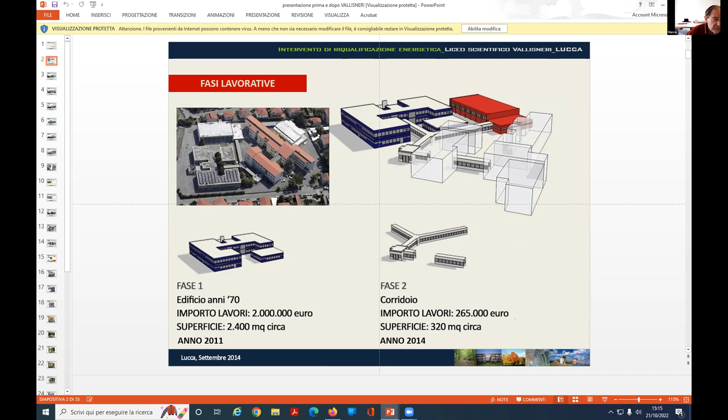We first approached this complex, and next we will show you all the different interventions we performed here, starting with the analysis of the existing building. We start with this one, which is a more modern building, because this one is the oldest, realized maybe 60 or 80 years ago. Then this building was realized, and that's the gymnasium. We started with this because, despite being more recent, it was badly realized.

The approach was to change the cladding, the exterior, completely, making a deep intervention to respond to the goals of the administration of Lucca. The goal mainly referred to energy conservation, but also to the safety of the building against seismic risk, because this is an area of Italy where seismic risk is quite high, as in Greece, I think. And the building, when it was realized, did not incorporate the most recent achievements in this field.

You can see on the left the images of the building as it was at the beginning. It is a precast metal structure, which was quite common in Italy in the 60s, and it has been totally retrofitted. Here you see images of both before and after the restoration. But let's start with the analysis.

Analysis means to analyze all the aspects of the failure of this building from the energy point of view, from the functional point of view, from the seismic response point of view, of course, but also from an aesthetic approach. Because I think that when the public administration decides to invest money in an existing building to ameliorate energy response and so on, there is always an important aspect, which is how the building communicates this to the users, to the population, to the city.

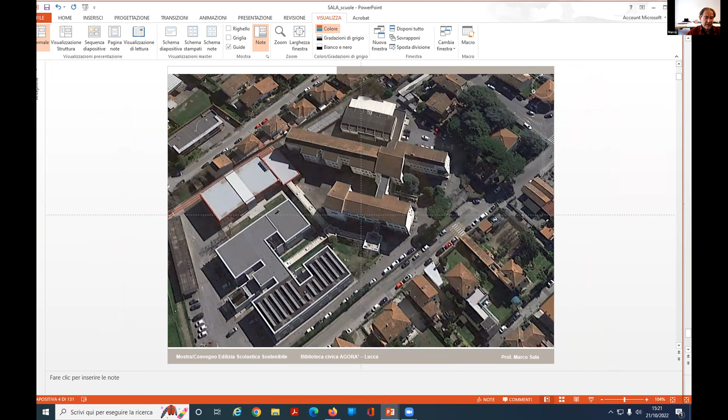So sorry for that. We started with the position of the building in the town of Lucca, and you see it's in the outskirts of Lucca. Here is the complex. This is the oldest part, the part in which we started the first intervention, and this is the gymnasium. The images of the building as it appeared before.

The different parts and the different phases, because when you approach a retrofitting program, very rarely do you start all together, but you have to organize different steps, especially when you want to keep the function running while you are working, as was the case for us, because the school was full of students. So we decided to make three different approaches. First, the anti-seismic response, then a part of the building with an increase of volume, and then the other part. And here is the strategy that's been applied.

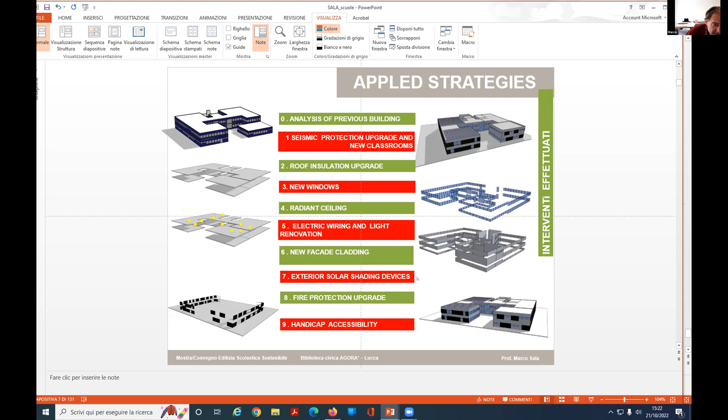Analysis of the previous building, seismic protection upgrade, new classrooms, roof insulation upgrade, new windows, radiant ceiling, electric wiring and light renovation, new facade cladding, exterior solar shading devices, fire protection upgrade, handicap accessibility. These are the different elements symbolized by the technical elements. And here is one of the first interventions.

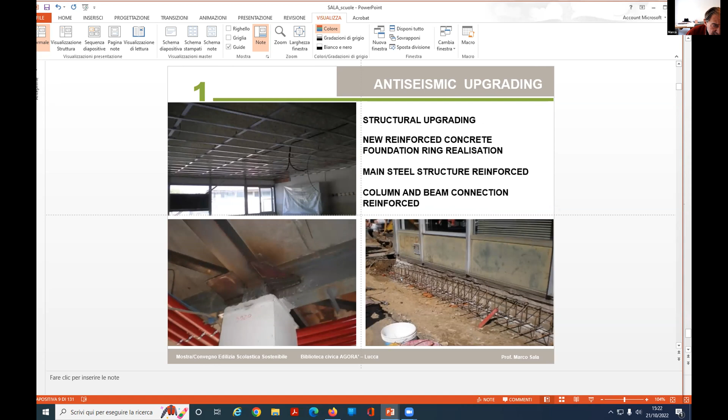We decided to intervene on the foundation by realizing a concrete ring at the base of the building, because these elements were lacking, in order to rigidly connect all the columns of the building. Then, since the building has a steel structure, which is quite an easy case, because you can always intervene on a steel structure, we may intervene by adding cross bracing and bars to increase the rigidity of the structure, or to increase the dimension of the beam itself.

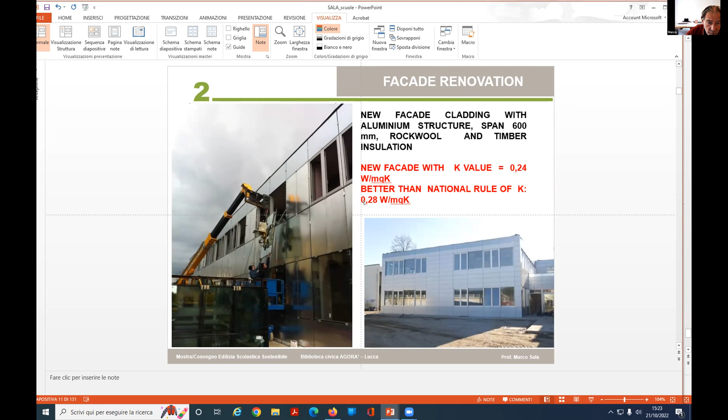Here you see some interventions from the outside, and the value that we were able to reach. The new facade was able to reach 0.24 watt per square meter, much better than the national rule, which for this building is 0.28. And here are some details. How do we apply this?

We decided to design a new cladding by adding components, different layers of insulation with different properties, glass fiber, rock wool, and plasterboard, and metal sheet to protect everything. Of course, the window frames were high quality, double glazed, and all the details explained. In the cladding, the final cladding outside was Alucobond with the aluminum surface, in order to have a kind of small ventilation under the outside skin.

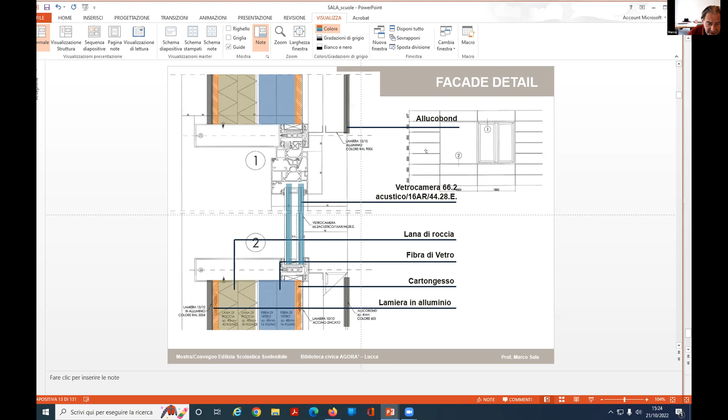And when you arrive to the ground, use a different kind of insulation, XPS, in order not to be affected by the humidity of the ground.

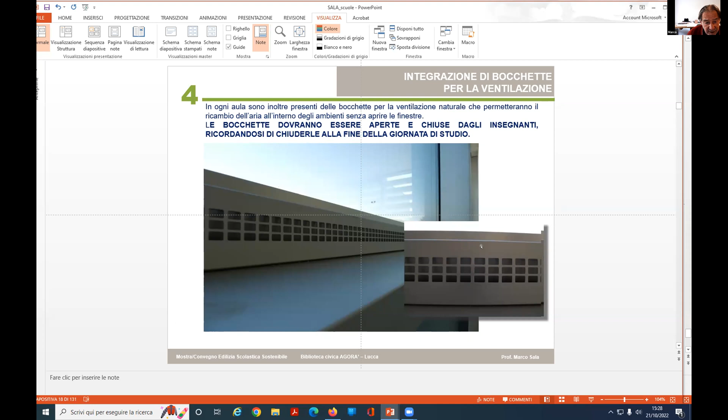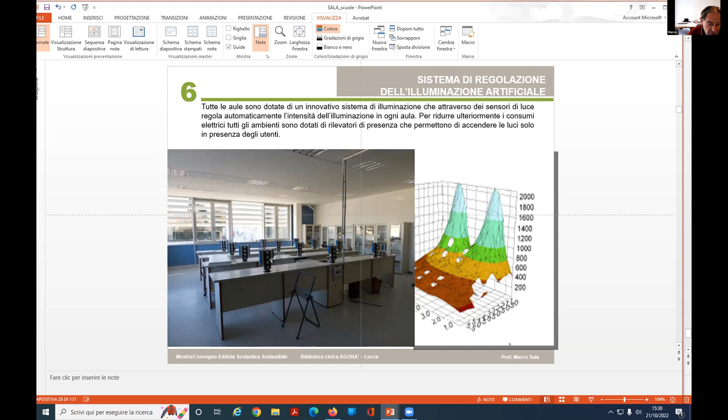But today you have to face the reality that, especially in university, most of the time people use computers, and having too much natural light affects the possibility of having a good view of the screen. And so this is one of the reasons to reduce the dimension of windows to the minimum allowed by the regulation, because there is no more such a need for natural light in the classroom, the laboratory, or the study offices of universities and schools.

Again, other elements, and here the elements of the calculation of the energy need. We pass from 60 kilowatt hours to 30, with a CO2 emission which is half of before. You have to think that a building such as a school or university does not have the same values as houses, because they are used for a very reduced part of the time. School during the morning or morning and afternoon, not during holidays and so on. While for houses the numbers are more important, because you live inside all the time.

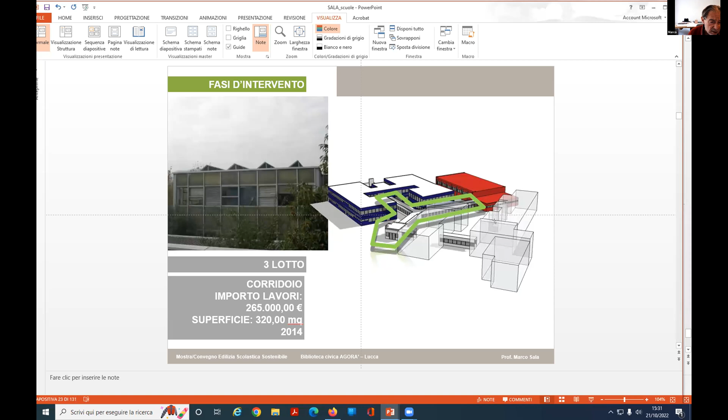Another intervention was regarding the connection elements. You see these connection elements with a simple corridor that connected the gymnasium, this part of the school, and the other part of the school. Also the very same type of construction, very poor insulation level, very poor comfort.

And here we decided, for the same reason as explained before, to give also an aesthetic approach, to introduce some colors. And in order not to seem too much like Gothic architects, but to take our inspiration from the past, we started from one of the most beautiful churches in Lucca, something most ancient, San Frediano, in which on the facade there is this mosaic with beautiful color. And so, of course, there are some explanations that are very good to present the project to politicians and to clients. Architects have to also couple their activity to this presentation.

So we decided to utilize some of the color. It is an excuse, of course. In reality, we wanted to have a brilliant color in this corridor, and also with the use of the new material. This is a polycarbonate wall, cavity insulated wall. They are 4 centimeters thick with a lot of channels inside. There is not direct vision, but you have only the transmission of luminance.

And here happen the very strange elements. These are the elements, very easy to be put in order. The aluminum profile, top and front. It can be up to 6 meters high, 6 meters long with these elements. But one aspect that we hadn't really imagined before is that when the building was finished, from outside you just see the color. It's also a very good element that makes a more pleasant and more friendly approach to the school.

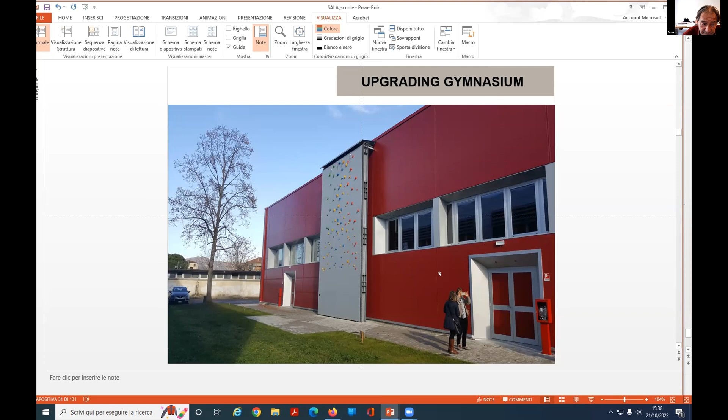And from inside, we added acoustic panels, because generally gymnasiums are very disturbing acoustic spaces, because the students make noise, cry. So the acoustic component is very important. And the result is this. It's the same school. This cladding in the red color is another aesthetic approach to make the difference between school and gymnasium. Here you make sport, here you relax through physical activity. So it's very good also to make the difference. And this is the thickness that we reach, because we added this on top of the elements that were exceeding the facade. And what is this one? This one is, oh, sorry.

Since we had to intervene on the structural and seismic resistance of the building, we built an additional resistance structure in steel and concrete outside, very high, on both sides, in order to block the entire structure of the building in case of a possible earthquake.

And on the exterior surface, since this is a sport hall, we made a climbing wall, using all the elements that are used for sport activity, for climbing, with the safety rope and everything, in order to utilize also this system. To try to couple utility with functionality, with the aesthetic aspects. And even this was very much appreciated by students. This was during one of the visits of Habitat Center, Master Habitat, that we performed in the past year.

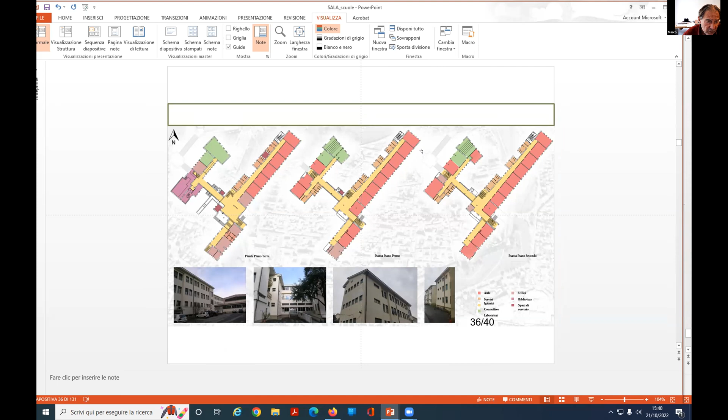And now the third part. You remember, you have seen this one. This is the existing, the more ancient brick block school. First step, analysis. The analysis of the structure, we made a historical brief control of how it was built at the time. We made a control also with the thermal camera in order to check the data of the block. Different floors. The distribution was classroom, corridor, and services on all the floors.

And we decided to make an approach to add some structural elements, as we had done in the gymnasium, to provide the resistance. And we developed with the engineers a solution in order to increase the structural resistance. The input from the property was additional classrooms, because the number of classrooms was not enough, anti-seismic performance increase, energy efficiency increase. So the first hypothesis was to add some groups of classrooms with steel and concrete in order to give resistance elements that could provide a good resistance to the whole building.

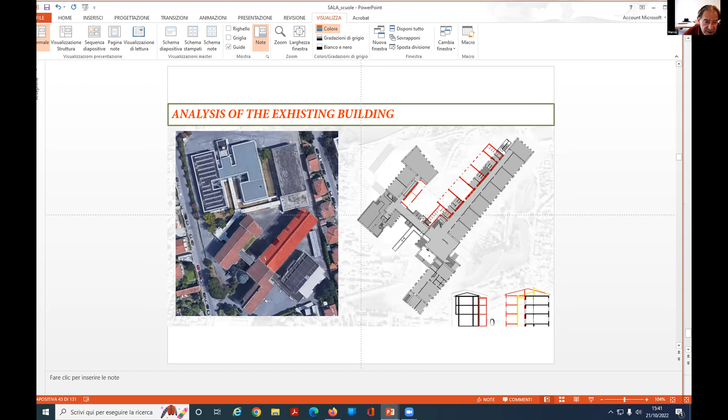This is the new one, this is the existing. We developed the technology, dry assembling, and so on, the idea of bracing with the steel structure, everything. The thermal performance was the easiest part, it was not the problem. But there was a problem that at the end, after this analysis, there was no economic convenience, because there is a rule, as in every country, in Tuscany, that if the cost of intervention per square meter is too high, in this case 850 euro per square meter, it is not convenient. It's better to demolish and make a new one.

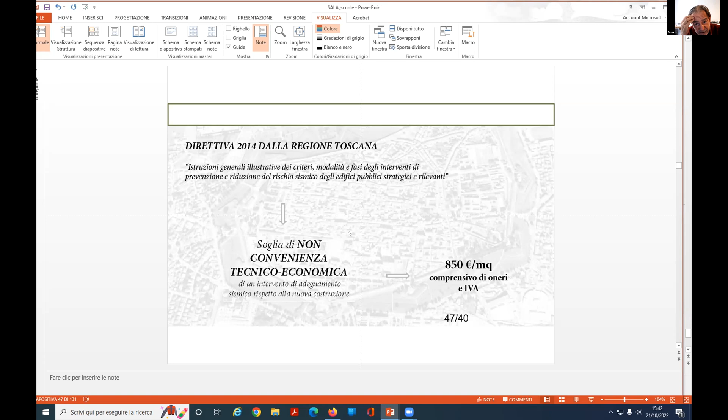So all this analysis, of course, we studied and were paid for, but the administration decided it was useless to spend all this money in this way. And so we decided to demolish the existing building to make a new one. This shows the importance of the previous analysis, the importance of evaluating all the possibilities you may have to give a correct answer to your clients, to the municipality, to the community. So this intervention was more, see, 1,173 was more than 850. So not economically convenient. So alternative interventions.

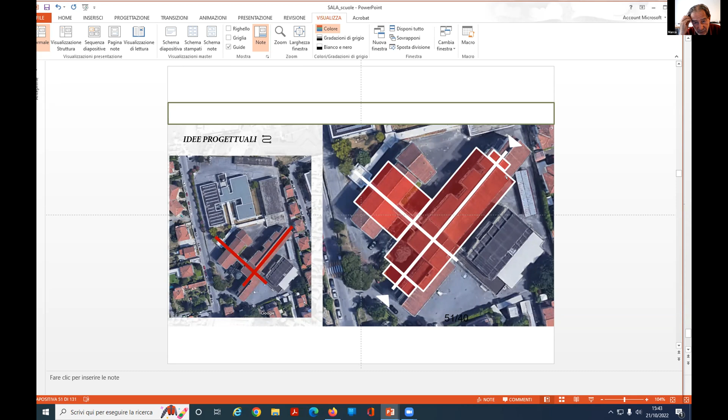These are the existing. Of course, the space is quite small, and also the access was important. And we decided to keep the access, to respect it, and to make a totally new building, very simple, very easy. Also because we decided to use as a structural technology wood technology, cross-lam and platform frame technology. So less is more. This is the most important sentence for architects, remember. And we decided to make it simple, because the value of architecture is not to make very strange or very artistic performance, but to give the best answer to the requirements of the clients, the requirements of society.

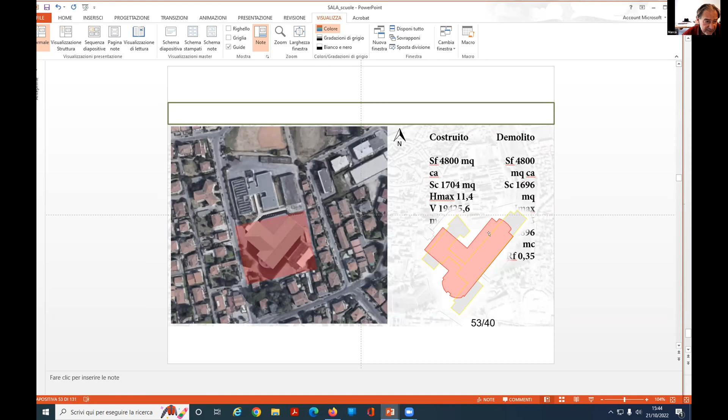So we designed a building which seemed a bit to come from the past. We decided not to have the traditional long glazing windows, as many schools after Le Corbusier have, these characteristic horizontal elements, but we don't need so much light in school areas. So we decided to have single windows, very regular shape, very regular system. These are the elements of the new building compared to the existing one. So it stays inside the dimensions and also the distance from surrounding buildings. And the distribution is quite easy, quite simple.

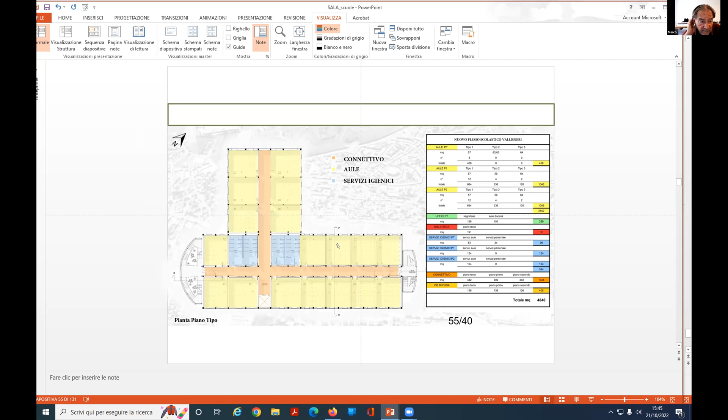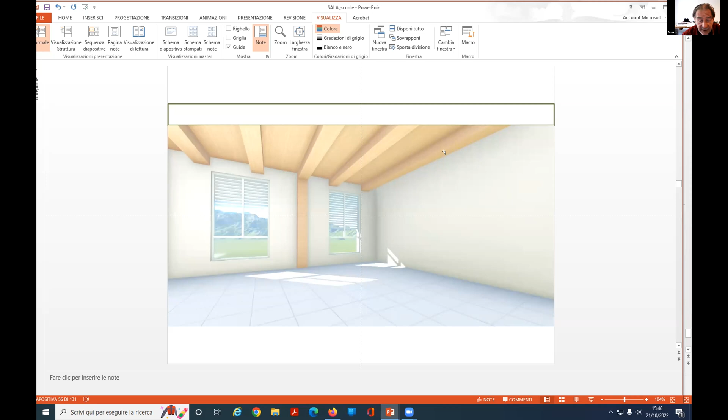Which is quite good from the aesthetic point of view, because if you go into the building, they say, oh, this building is built by wood, and the building is exactly the same as another done by brick, and you don't feel much excited about it. So what was the reason if I use a technology that I cannot see? But there are also technical reasons that do not allow making this decision practical. But we try always to

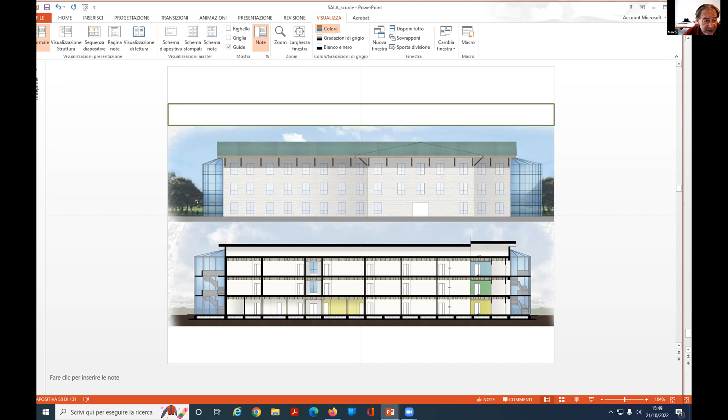The structure is a combination of platform frame and X-lam frame, because it's a very quick system of construction, with very good performance also in anti-seismic resistance. There is maybe one negative aspect, that you cannot modify it. But why do you have to modify a school? The classroom remains a classroom. Sometimes this aspect of considering the possibility of changing during the years is one of the many illusions of architects.

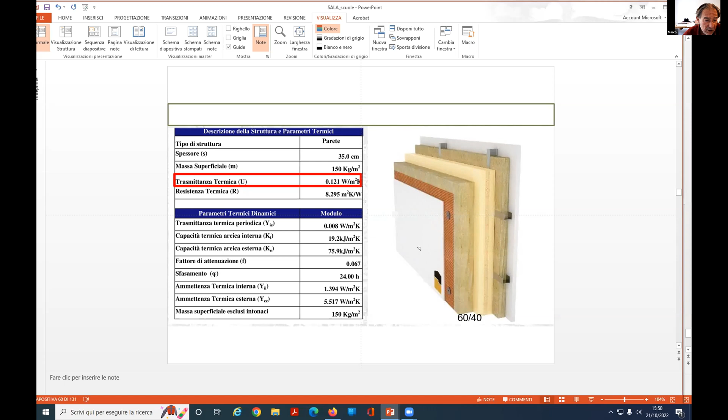And from a technical point of view, we wanted to utilize heat exchange with the ground, but later on, discussing with our engineers, we decided that it was better to have a heat pump in this space on the top floor, and photovoltaic panels on the south-exposed roof to supply electricity to the heat pump.

Again, the detail of the staircase, and this element. This is an intermediate space, a winter garden. It means that it's not heated. There are no heating elements inside. And during the winter, it naturally stabilizes to an intermediate temperature between outside and inside the building. It means if you have 0 degrees outside and 20 degrees inside, this goes around 11, 12 degrees.

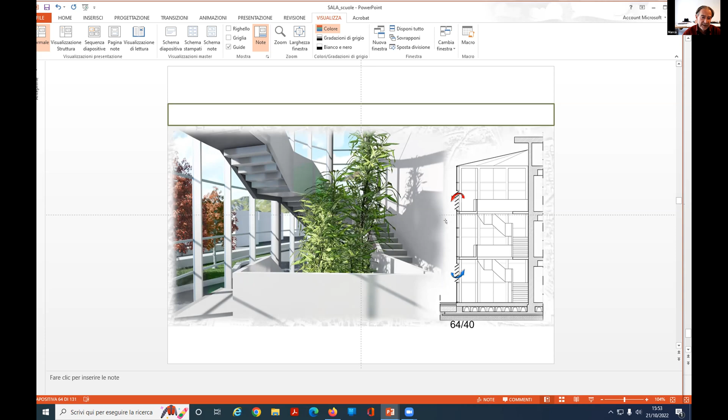And the important thing is to over-dimension the openings and to make the openings automatic, all electric, in order to have control during the summertime of the real ventilation, following what you have in mind, not only because you have designed a red arrow or blue arrow. And again the approach from the street and the corridor became a symbol of this structure.

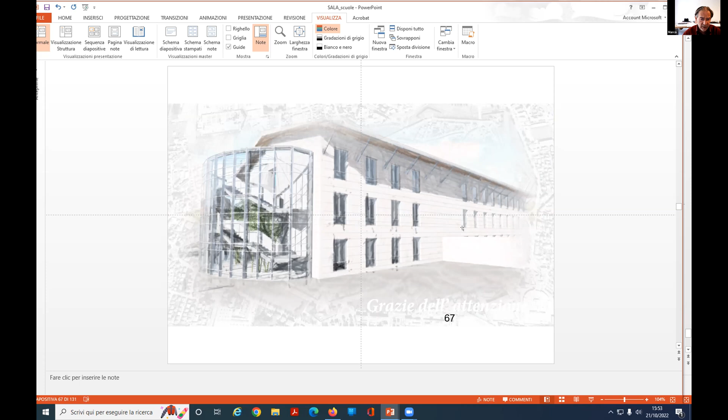There are economical aspects, and also from an economical point of view, having done a very regular structure allows you to have a good performance. Another very small and very simple retrofitting intervention is near the seaside, another school. Here the sea; the school is a big building, realized during the 50s, 60s of the last century. Quite a big intervention.

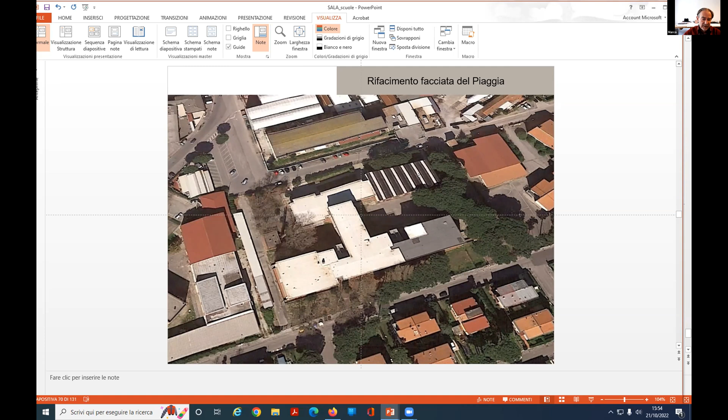It is a waste of money, because when you realize this kind of solution, you don't serve the interest of the clients, you damage the clients. So the answer is very easy. We make insulation, we reduce the windows, we add thickness because the insulation in this case is quite important, 20 centimeters of insulation. And the activity inside is exactly the same, much better, because for the secretaries working on a computer, this glazed facade was terrible, while this is proportional. You have to control it.

This was the rendering of the proposal. Sorry. These are very bad quality pictures. You see, you cut, you add the insulation, then you make the plaster of the different layers, the thickness and two kinds of insulation, the resistant elements, and the final cladding.

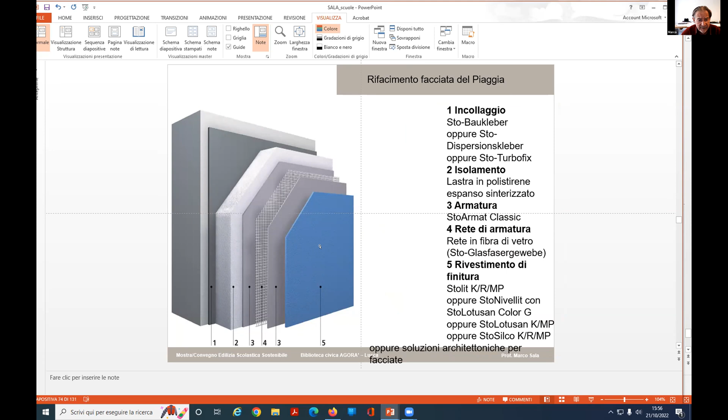And this is the result. Change the approach. You see that the school has changed. This is the reality. Maybe the color is more thick, but you have given the school comfort, a reduction of consumption, reduction of air conditioning in summer, because there are offices, reduction of heating in winter, and comfort for working people.

Very small, very simple interventions, but sometimes, again, I remind you that less is more, sometimes small is beautiful. Less is more, you know, is the important architect; small is beautiful is another important architect, a very close friend of mine, an architect from Greece, Alexandros Tombazis, who was one of the inspirers of this sentence.

And now let's pass to another big institute, a big complex of buildings, again in Lucca, the Carrara Institute. This whole project was carried on firstly with the ABITA Research Center, with other colleagues, of which I was the director until 4 years ago when I retired, and then realized with professionals who were in charge of completing it.

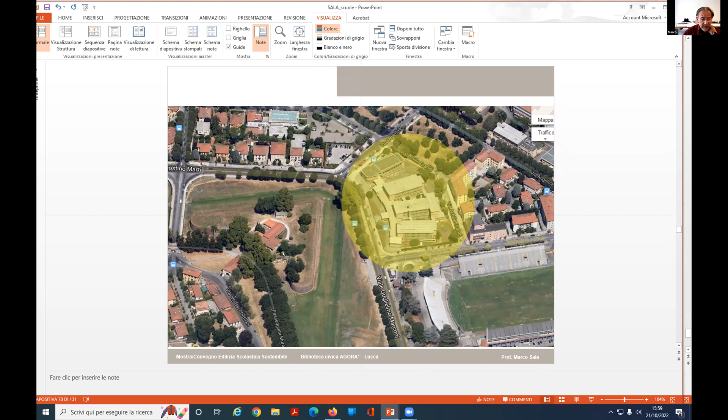So it was under the control of the rules of the superintendence, the offices that control the relationship between new changes and the artistic beauty of our country. And it's a very big complex made of 4 different buildings connected together by elements of corridor and connection. So here is the city wall.

Again, we started from the analysis. We started to understand what is the problem. The problem was very easy because even without looking at the thermographic control, you see very well from the picture what kind of old-fashioned architecture remained, misuse of concrete elements, because the concrete, when you use it in small dimension, as it was in the small pillars of the facade, is very much affected by corrosion, because the steel inside is attacked by rust, and the rust expands the material of the steel and disgregates the concrete.

And so these are the typical elements of disgregation of all the elements, even thermal bridges, unfortunately. So the result given by the thermocamera was a total lack of heat containment. It is like being in open air. You may put the heat inside, but the heat goes outside. So the first problem was to reduce heat consumption in this building.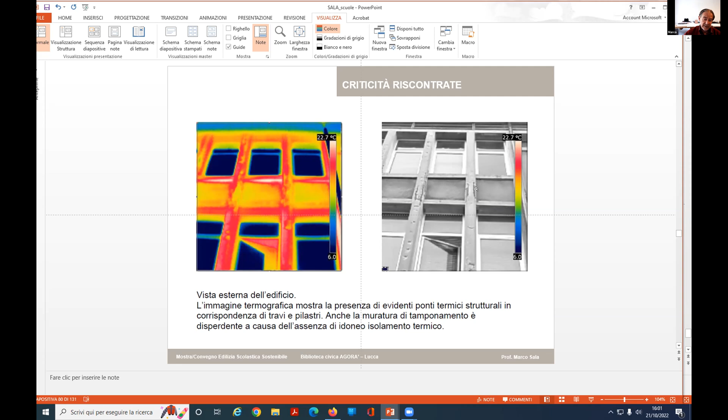This is the lower part of the window, and in the thermographic image you see how it's been built. There are the masonry blocks, and you see the difference of color, because there are thermal bridges where there is the connection between block and block. So it's a total failure of this facade and it needs to be protected.

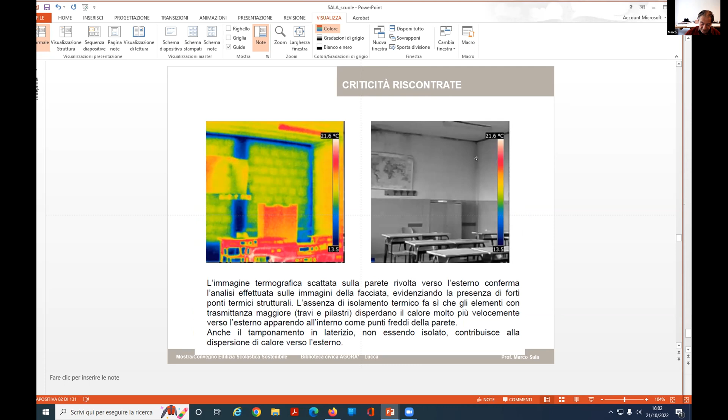Here, this is the interior. The picture is from the interior of this classroom. You see the wall, all the brick, and then you see all the thermal bridges, because the humidity affects the angular elements at the thermal bridge, and then all the disgregation elements of vegetation across. You see again all the elements. So we have to face a very important problem of conservation and how to control it.

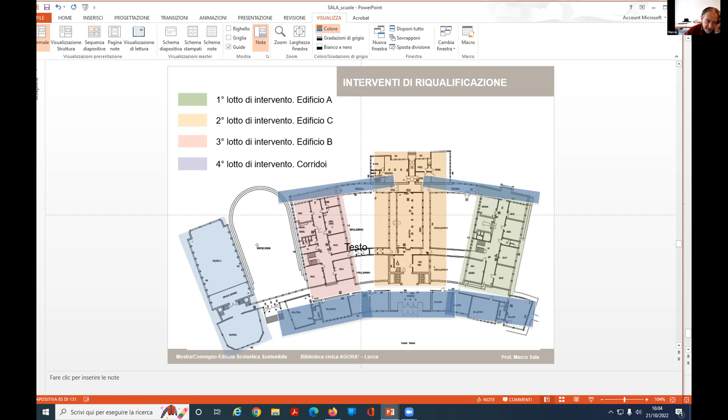This is the front, this is the gymnasium. Even this has been divided into different steps, first of all for economical reasons, and secondly because we had to keep the didactic activity going during the time. And so this was the first that we approached. This is the second and this is the third one. As explained before, the elements at the floor between the two resistance elements have been totally renewed.

These are the technical drawings. The outside elements we decided to design in concrete as was traditionally done, called the barbicans, elements that try to contrast the movement of the building, to give it, also through its shape, the necessary strength. We also decided to close some windows because there were too many windows, and to modify some existing windows to enlarge them. The combination of these two elements gives enough strength to improve the performance of the building in case of an important earthquake.

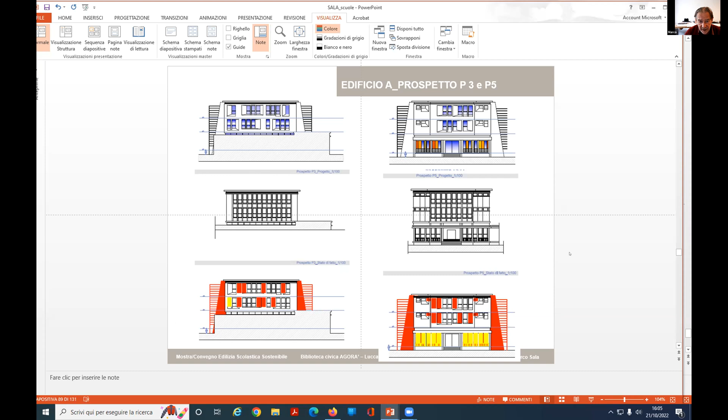So here again you see the elements. From the front, the original idea was to have some color, to have a different approach to the corridors, closing the front to the wall. That is different. And again, how to design these insulation elements? Not only this way, but to cut them in order to allow the light to arrive better inside, also to see outside better, and also to have an aesthetic approach from outside.

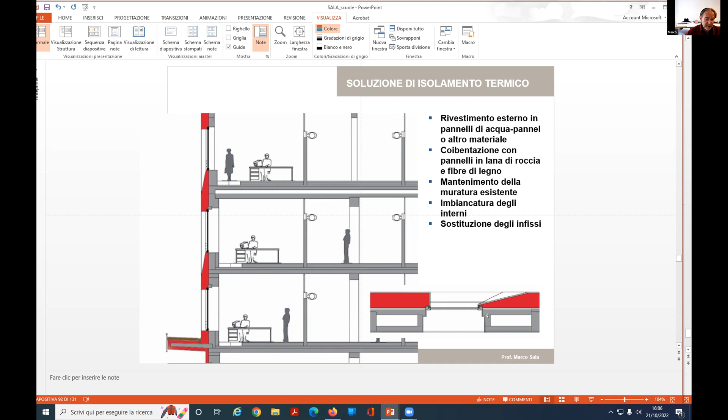Of course, to have this performance, we have added a bit more insulation, because otherwise, if this was the standard, it was too little. So we added 5 centimeters more to these elements that are closing the building.

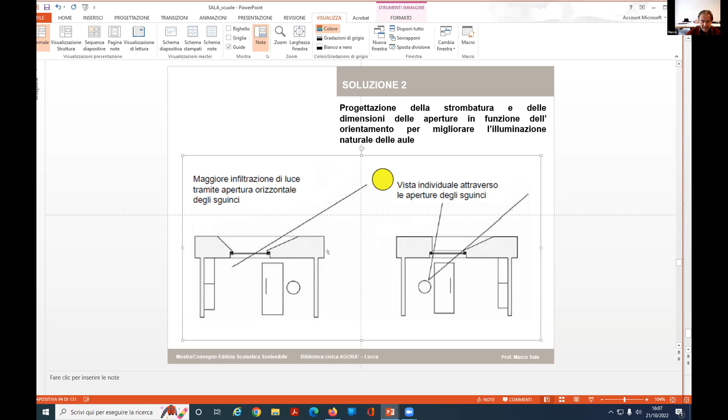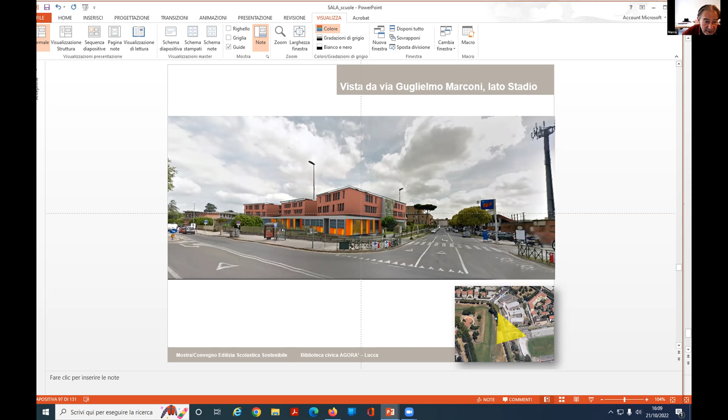And these are again the renderings of the complex. Yeah, the city wall done in brick. This is an important position. So it's also correct that there is this control over the new interventions. Different view from the back.

And this is the reality. This is the building realized. You see, it very much looks like the rendering before. This is important because it's not easy to realize a building with all the constraints, all the difficulties, the difference between theory and practice. In Italy, there is a popular saying, fra dire e fare c'è di mezzo il mare. Between saying and doing, there is the sea in between. In this case, we were able to realize it.

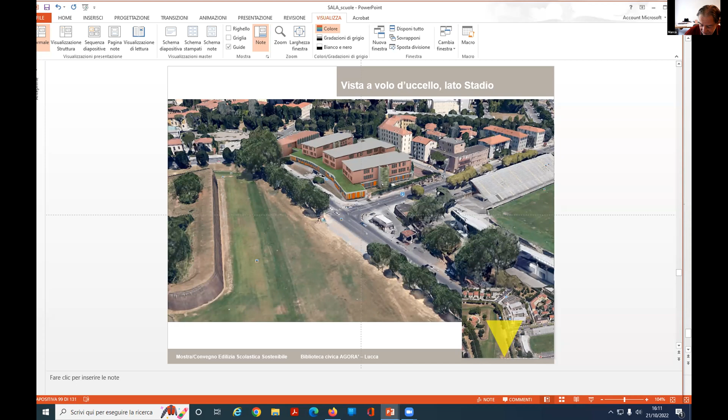Not in this part. These are the strength elements to give rigidity for earthquakes. In our idea, you see in the rendering there is some green, because the idea was to connect the two concrete walls with suspended green elements that give a more pleasant approach. But the administration didn't appreciate it because they estimated that maintenance was too heavy. This is a pity because I think it was important to have these green elements as a signal, and it's easy to choose plants that can grow without much care.

For the rest, nothing to say. It's worked very well. Inside, the students appreciate the quality of the interior space, both from the luminance aspect and the acoustics inside are correct. So it's been a successful element. These elements in front still have to be done. It's under construction now. I'm told that they have been put in charge to perform the whole complex.

We suffered a problem last year due to the excessive rise of the cost of building materials, which in Italy was partially provoked by the international fluctuation of material costs, China intercepting much raw material, but mainly because in Italy bad laws were approved that allow people to spend money to change the cladding of buildings and get reimbursed by the government.

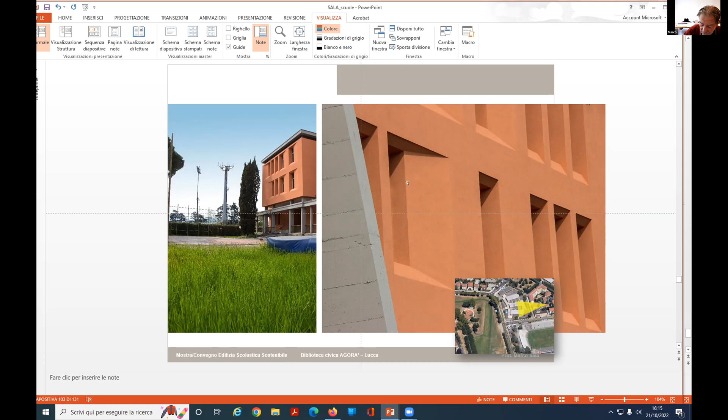Again, some detail. It's a very good technology. You see, there are no more elements surrounding the windows. There are no more elements here on top. Everything is covered with the same insulation, with the same plaster and resistance elements. So you don't need additional elements. And what doesn't exist doesn't cost. Okay. So the cost of this facade is also a contribution of different aspects, a different approach.

Inside the building, we just had to make new plaster. Now the ceiling has this false ceiling because this element contains new lighting and new radiant ceiling.

Before, the original level of the floor and the ceiling was this one. This has been lowered to host the heating and the elements.

And then the last element, the Majorana, which is again near Lucca. Again, a complex of different school buildings, all part of this school complex. They decided that they needed to intervene on these elements. And again, these interventions have been divided into different steps because it was not enough to start all together. This was the existing part. First step, just to add a simple group of classrooms.

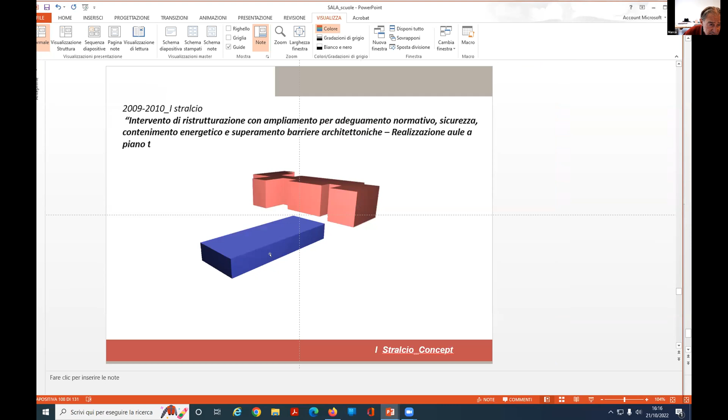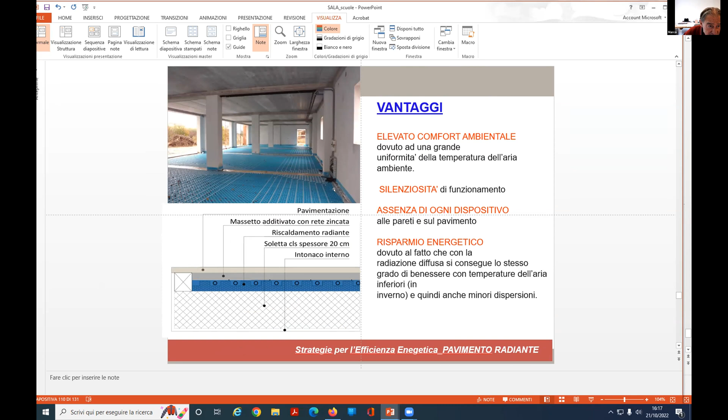Very traditional construction, very simple block, insulation block with insulation again, the pillars, new window frames, and so on. Radiant floor, this time not radiant ceiling, radiant floor, in order to separate from the ground also. Standard concrete structure, all to reduce the cost, because the aspect of cost, as in every building, is pretty important. And this is the first step.

Very simple. The color, I don't totally agree with this color. I prefer to have a brilliant red, but this time the administration did not agree. Then second step, to add another floor on top of it, to add a glazed element to connect, and to have a double roof to protect from the sun and to avoid the direct radiation over the roof of the building.

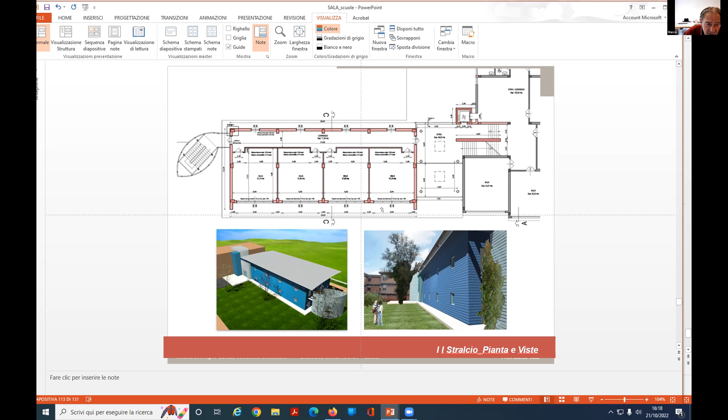Here is the intervention of the ground floor, and an interesting approach about the ventilation. Here you see a very classical layout of classrooms facing south, a big facade facing south, corridor on the north side. But if I open a window here, I have a very small change of air inside. So we decided to have some connection over the corridor. The corridor has a lower ceiling to connect directly with the northern facade, so that if you open both openings, you have cross ventilation in the classroom.

You see, this is the corridor. The air comes from outside, passes into some tube, the ceiling is in this position, and it can arrive into the classroom and then go out from the upper part of the windows. These are the double roofing, metal double roofing. And again, this is the structural element. You see the passage of air; this is the function to control solar radiation.

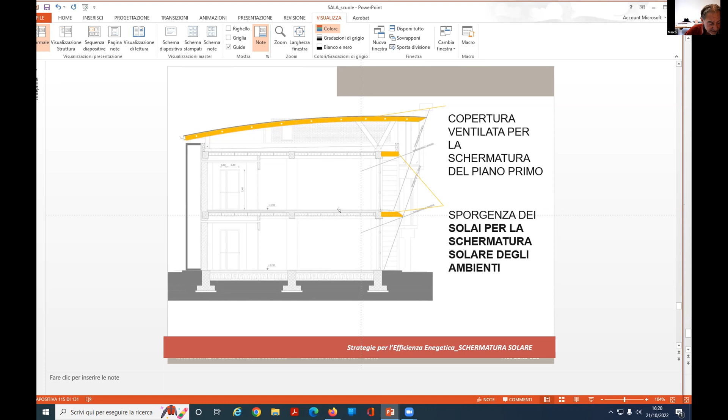In reality, we had to add also an exterior sunscreen because these elements were not extended enough. To be more effective, you should have maybe 1.5 meters, maybe 2 meters, excessively long. So we decided to provide an exterior sunscreen to protect the facade. That is the rendering of the images.

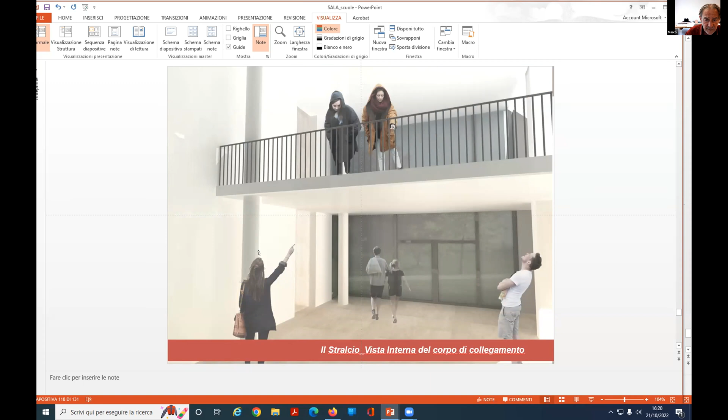And then this is the additional staircase just in case of accident. And this is the double layer glazed element, the entry, and the intermediate floor that allows students to see people from different heights.

And in reality, this second floor has been done in a different way, not with traditional brick, but with light steel frame, cardboard, insulation inside, acoustic and thermal insulation. This is a much simpler, easier technology, but it also allows good acoustic performance between one classroom and the other, very quick, very clean work, and no waste of materials.

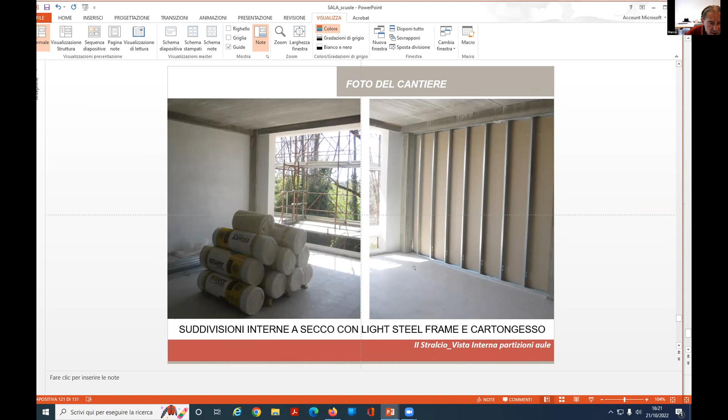During the construction, we applied it directly over the concrete of the floor. And here are the structural elements that allow the double cover over the roof that protects from direct radiation.

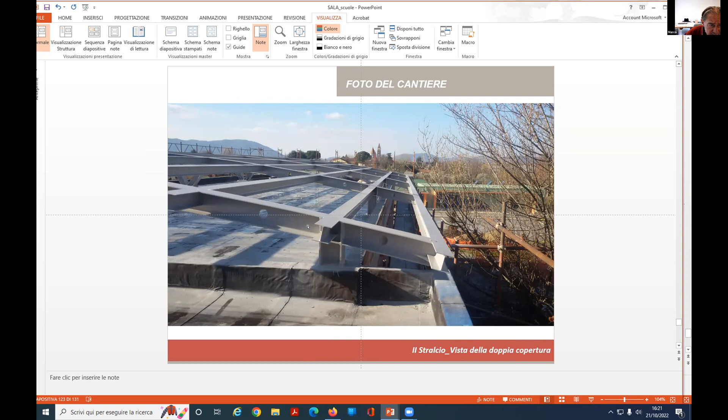And here is just a joke, an image like the codes scanned from the smartphone. We have used simple and cheap tiles, black, white and dark gray, to compose the kind of image to be scanned by smartphone.

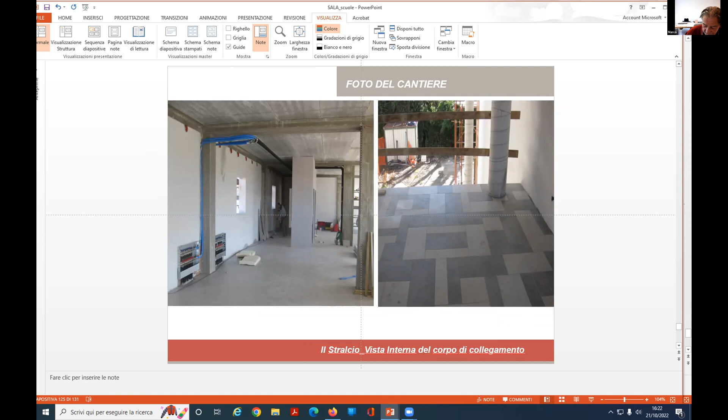There are some other images. Again, these elements, which is the connection and the entry, we had done again with the polycarbonate for problem of cost. In this case, not colored, but just white. But it's an interesting approach, because it is a corridor, an intermediate space. And so the insulation provided by the polycarbonate was enough to give the performance. These are glazed doors, and the good elements of connection between the existing building and the new building.

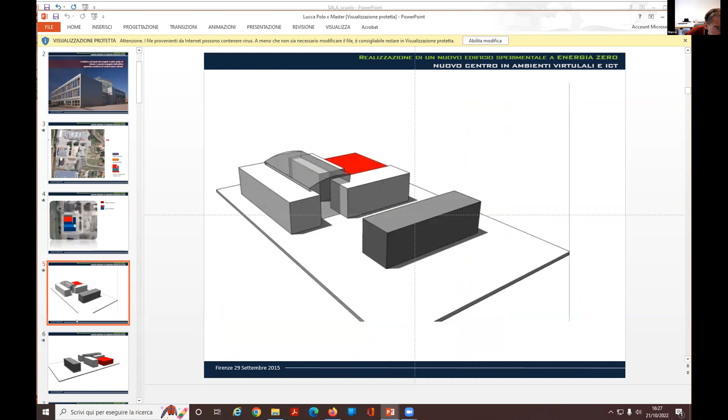Then there is a corridor of the building. There is a corridor covered with glass. You see, these are the south windows. There is a garden over the roof of the laboratory. These are the elements. The project. These are connected. Each element is a company.

They are nearly 70-80 square meters. It is a small company that rents the space. They have all the services furnished by the ruler of this project. They share the services, and they share this big greenhouse, this big winter garden that gives entrance to all the elements. This is the first floor with the garden on top of the laboratory elements.

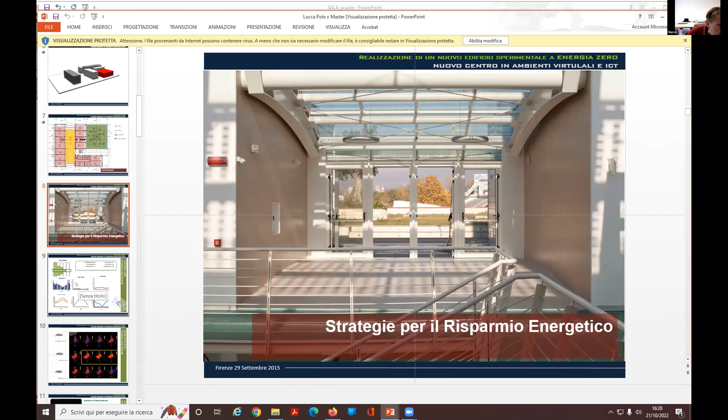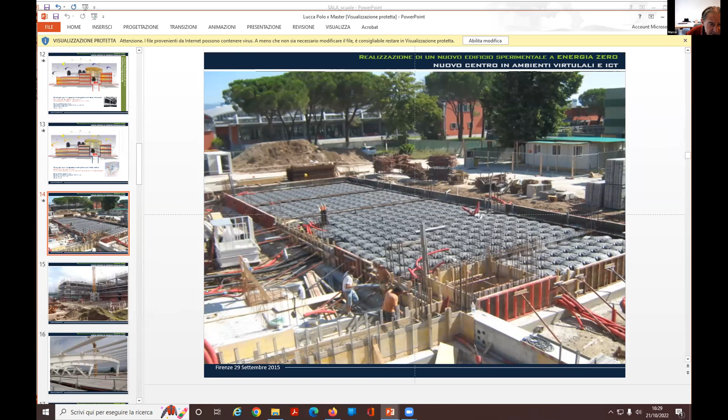There are some slides of the opening over the winter garden. Some analysis. Yeah, there's a section, the garden on top, and the winter garden. And here are some elements during the construction. The first approach, of course, the foundation, but it's not the foundation that's interesting. Interesting is this thick tube, because the first element has been to dig 18 deep wells, 80 meters, to make a heat exchange with the ground. These are the first elements to be realized.

Here during the construction of the glazed roofing, the entry, the glazed roofing. This is the same principle of the facade with the opaque elements that contain different layers to modify the performance of the windows. But since this facade is exposed not to the south, but to the east, the opaque element is covered with glass, could be marble, could be brick. It's just an exterior decoration, not really functional. The function is inside. The performance of the facade.

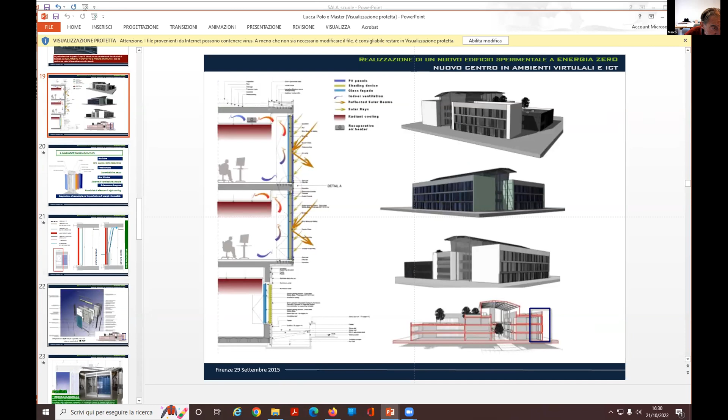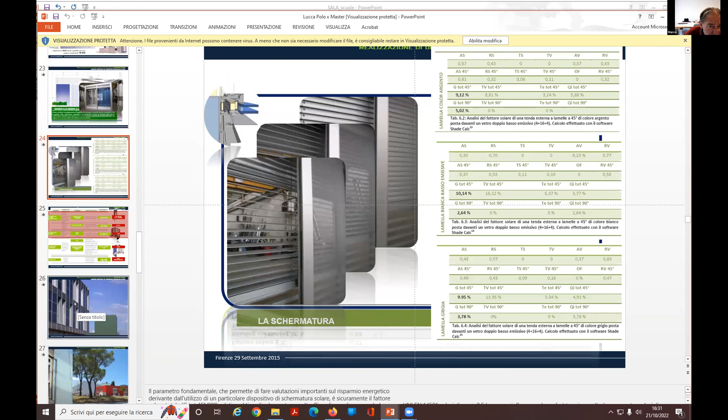Of course, we have realized a prototype before. This is the prototype realized in the factory. And this is not the real PV, just a glass, since it was a prototype to control the element and the passage of the elements. And in the performance, it demonstrates that it has a good impact also.

The glazed corridor has a huge balcony to give access to the offices, and just to increase the light inside, we made the pavement in glass. Of course, not transparent glass, not to see the legs of the ladies, but to let the light arrive inside. It's making also a very beautiful effect.

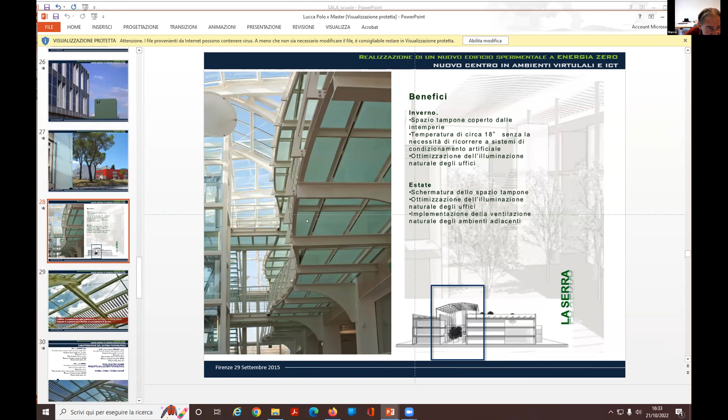And also the shape is not to have what I call a prison feeling, or having straight balconies; it is curved, and the curves are different on each floor in order to help ventilation, to help light passing through. The top of the building is glazed. There are some photovoltaics in the glazing.

Is it useful? Very poor, because the quantity of photovoltaic is much less than if I have a wall panel. But this is communication. This is important because everybody goes into this gallery, raises their eyes, sees this roof and says, oh, there's photovoltaic in this building. Because today photovoltaic is not only a powerful way of producing electricity, but it also communicates the concept of sustainability, the concept of being up to date with new technology.

And for this reason, we applied photovoltaic on a normal roof in the standard way, but we wanted to apply it also here just to give this feeling to everybody who gets into this structure.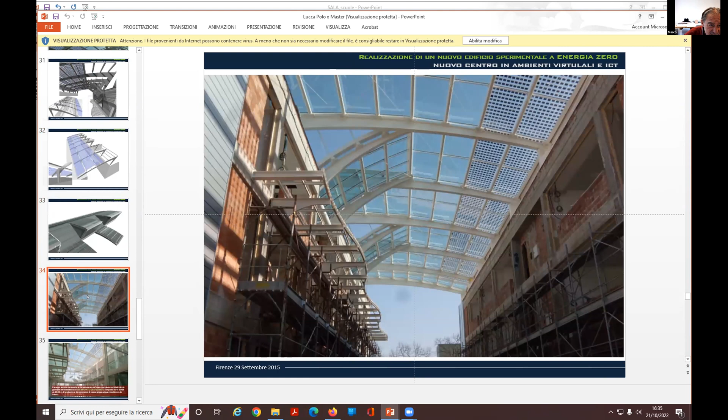This is during the construction. This is the luminance. You see the effect of the light arriving here into the gallery. Here the garden. Inside the garden, there are also these elements that allow the light to go into the floor of the laboratory section. In the middle of the garden, there is an olive tree.

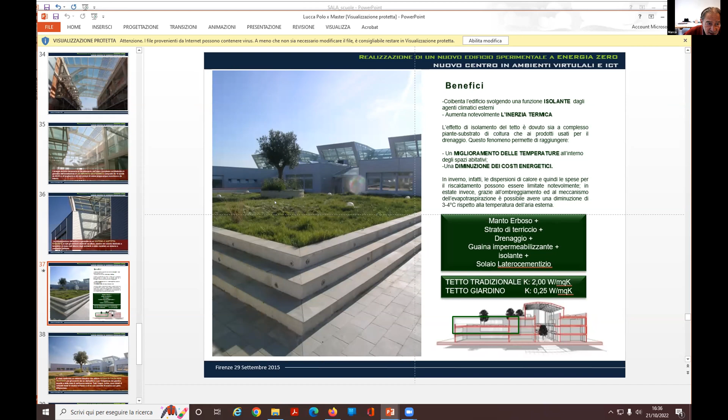Olive trees because Mediterranean, because the olive tree is the symbol of peace, but also because under this tree there is a crossing of beams and there's a pillar. So it's the most logical place to put the additional heavy load over the structure. So it's not always an aesthetic approach, but also a reason.

And during the day, people from the offices come here to smoke a cigarette, to eat something, to see the countryside. From here you see the city of Lucca in the distance, you see the mountains. Very pleasant for everybody who works in this complex. There are other elements to provide ventilation.

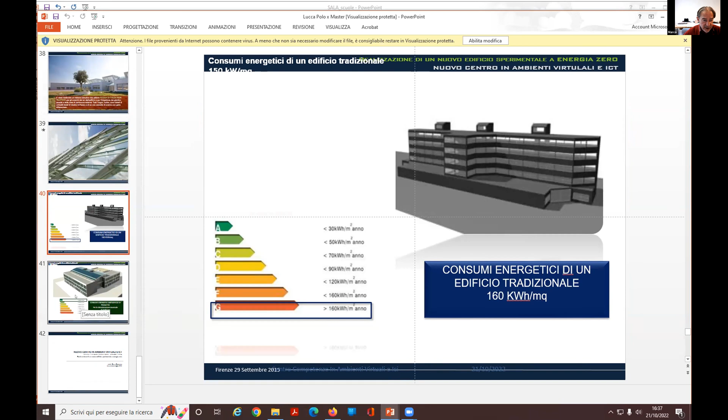The consumption of a traditional building is quite high. The consumption of our building is very low. This building has been published in magazines and books because it's a kind of concentrate of technology. Every year we make a visit with our master class in Florence, because thanks to the administration, thanks to the Chamber of Commerce of Lucca, we were able to introduce a lot of innovative elements, but always without surpassing the budget that was assigned for the building. This is very important because to make good things with a lot of money is easy. To make good things with less money, much less.

Thank you everybody, and I'm waiting if you have any question, any curiosity about the presentation. So thank you very much, Professor Marco Sala, for your presentation, and of course for the opportunity to see some practical examples regarding rendering and presentation and how these kinds of buildings are shown in these programs. If there is a question, at this time I think it is possible. I think everyone understood everything perfectly.

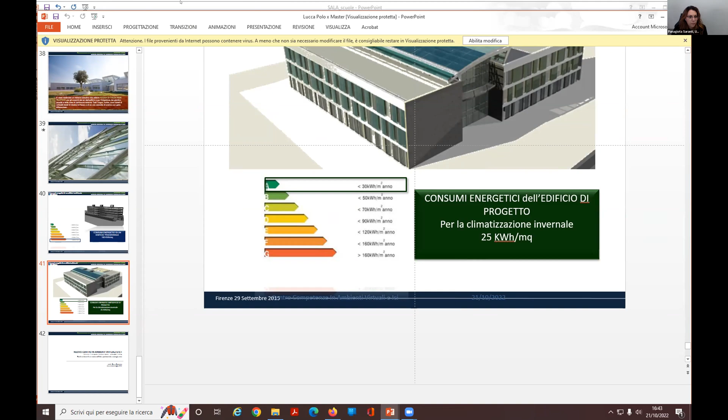Hello, good evening, Professor Trombadore. So we're getting back from our small break and from the presentation from Professor Marco Sala. It was a fruitful presentation, and he showcased us some examples and some case studies in Tuscany as the first part, and regarding rendering, and how this can be done, and some basic examples where he has implemented this kind of methodology.

So at this time, we should continue getting back to the MED-EcoSuRe outcomes and the MED-EcoSuRe toolkit as a solution that we have been showcasing in the last few sessions. And as this method said, we should continue now with the fourth step of the retrofitting solutions. That is the intervention, correct? Yes. Okay, so Professor Trombadore, you will be doing the presentation?

Yes, let me share the screen. Mm-hmm. We can see your screen. Yes. Okay. So you can start. Perfect. Thank you.

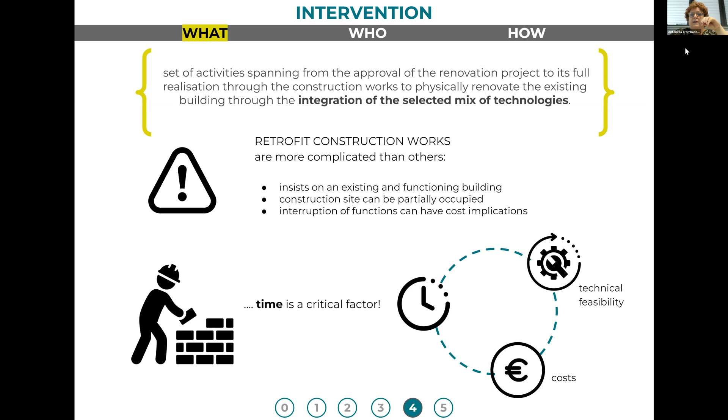And time is a critical factor. So you need to plan the building site in order to combine the different activities of intervention, evaluating the technical feasibility, considering how much time you will need to implement this kind of work without any additional cost. So this is a verification that you have to do before starting the intervention.

What about the people involved in this kind of phase? Of course, the researcher can support the evaluation of the tender. As I mentioned before, in order to assign the work to the building company, you have to cross the phase of tendering. And generally, as public administration, we have to do a public tendering. So in this way, the research could support ensuring quality in some specific elements of the tender. Because generally the company will propose some reduction of cost, but proposing some different solution. So it's very important to foster the quality.

But there is another very interesting activity: during the intervention, the researchers, maybe with students or with the company as well, can document and valorize the implementation of the renovation, collecting video, creating some storytelling of the intervention phase, and transforming the experience into a best practice of the pilot project.

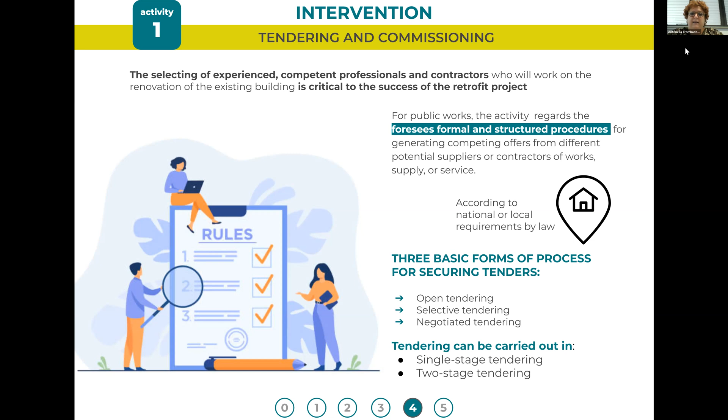The last one is the typical negotiation, where it's possible to discuss with the company, maintaining a similar cost, maybe introducing some innovative element or other solution, much better than the first proposal. So I think it is more advantageous for the public administration and for the university to introduce this kind of negotiated tendering. And the tendering could be carried out in one single stage or in two stages, according to the level of complexity, how many technologies, and the budget.

According to the national law, it's possible to create many documents. So it is a very particular activity where you have to prepare and collect administrative documents, technical documents, sometimes financial aspects of the company. So it's very important to create an interdisciplinary team. In this way, the Living Lab could be very interesting in order to organize meetings, discussing with the companies that could be selected or are interested to participate in the tender, in order to discuss the specific requirements of the project.

They need to do a better offer, an improved offer, improving the quality of the result. In this way, of course, it's very important to define the renovation project with specific details, like many annexes or sheets specifying the performance of the proposed technological mix, in order to help the company present a very good offer. According to the dimension of the renovation project, the documents can contain technical drawings and other elements with more specification about the solutions.

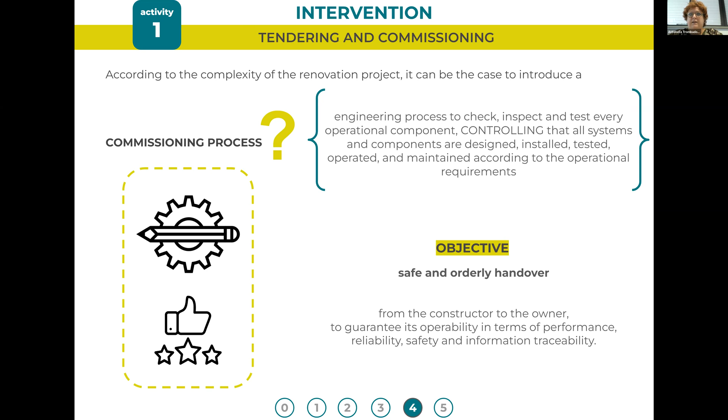And what about the Living Lab? Also in this phase, the Living Lab could be very useful for the interaction with research, which can propose innovative examples of tendering, introducing more qualitative procedures, not only for the discount but, as I mentioned, to improve the quality. For the building manager, it's very interesting because they can organize, launch, and evaluate different kinds of tender. So the building manager has very good support to create a good decision support system in collaboration with the researchers.

Of course, the involvement of the companies is a very particular activity, because according to the national law, there could be an interaction. So it's very important to define in which way the suppliers and the companies involved in the construction can participate in the tender. Generally, as public administration, we collect 3 or 5 offers for the tenders. Otherwise, it's not possible to have a direct contract with one single company. So in order to organize a better contract, of course, you need to follow all the national procedures.

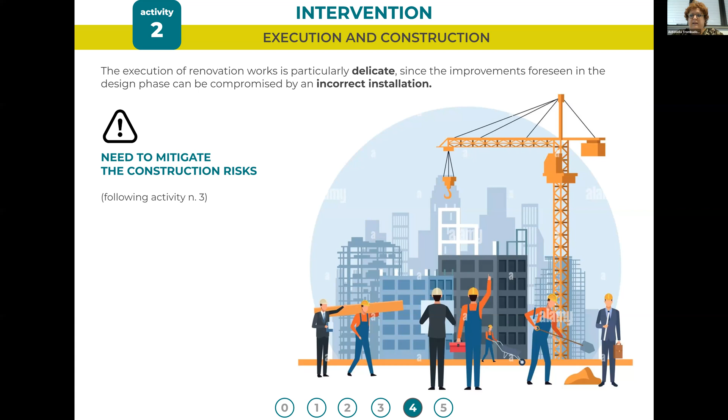And again, the Living Lab could be very useful because researchers can organize several events dedicated to the students. So in order to stimulate the participation and the engagement of students, not during the real activity, but looking and searching and investigating, so taking some experience in the visualization day by day of the process.

For the building manager, the team of the Living Lab, it's very useful to implement the supervision activity. So for the assessment, for the control of all the steps of the intervention phases. The students can participate in education events, and for the company as well, it is a very good opportunity to have like a showroom, so a very physical exposition of their best technology and best solution.

For the students, the opportunity to have a very real life experience and to have some information provided by the company, with the opportunity to touch and to see and to follow the process, I think it's a very great experience to remember and to valorize in the future.

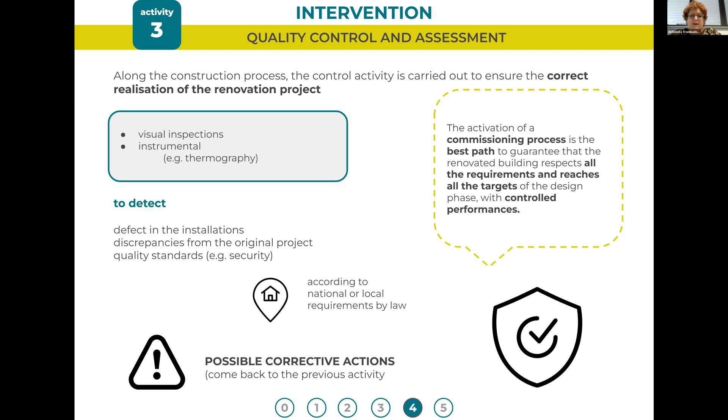The research can support the building manager to achieve the target, so controlling, implementing the assessment, structuring the reporting activity, collaborating with each other to define the quality report. The quality report is a very useful document describing all the history of the project.

And this way it's possible then to evaluate if the experience could really become a best practice. So an example to replicate with the methodology in another context, and to be described and integrated in the common platform as a very good experience to be replicated.

Otherwise, the company can search and check the real performance, the target, and evaluate if really the target has been reached, or which is the gap between the proposal and the real realization of the solution.

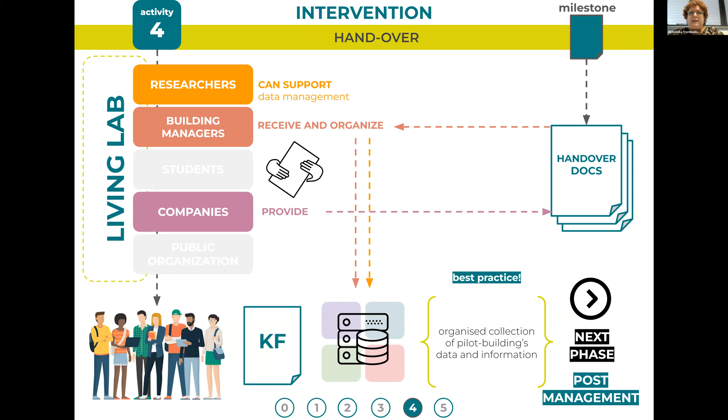Otherwise, when we monitor the post-management activity, we can search and we can demonstrate sometimes some mistakes that were made during the construction and the implementation of the project. So for this, it's very important to develop in the best way with a very strong control. So implementing the control day by day of the building site, with the company collaboration, because the last phase is really dedicated to the post management, and it is the main control activity, and to close all the process, demonstrating the really successful activity of the pilot.

In the last phase, we have some key topic activities, very interesting, and this is a very key role. There is a very key role of the living lab. Why? Because there are some activities not only at didactic level, but also creating some dissemination and some advertising aspects, where it's possible to publish and to have an enlargement of interest in the building site.

But also it's very interesting to monitor the real performance after the construction compared with the first target. How? Through some monitoring, through some sensors, through other specific tools, not only simulation, because we have done the simulation during the design phase. Now there is the verification of the idea, of the previous and predictive action that we did during the design phase.

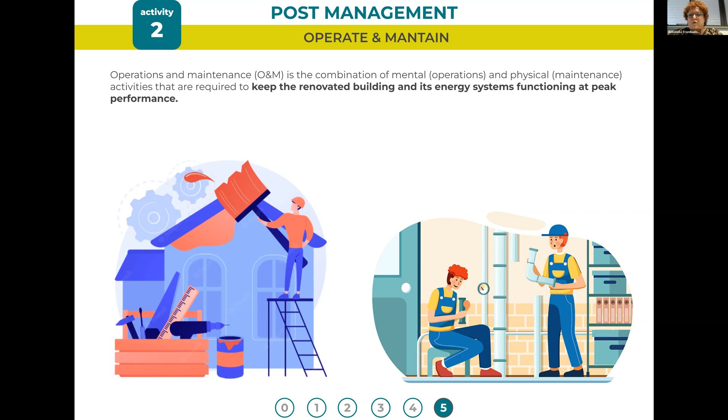So in this way, the combination of mental and physical, so the operation and maintenance, is required to keep the renovated building and its energy system functioning at the peak, at the maximum of the performance. According to this activity, it's important to change the vision, because generally the operation and maintenance is related to reactive action. So there is a problem, and then the company or the people involved in maintenance solve the problem or adjust when something breaks, or adjust something that doesn't work. So it is the typical activity in the public building, no? The reactive solution of the operation and maintenance.

The upper level is the prevention. So programming some activity in order to avoid the adjustment or to delay the adjustment, or maybe sometimes plan some regular intervention in order to check if the plant is okay, all the fittings are okay. In this way, it's possible to have much more saving in the long term.

But thanks to the Living Lab, again, it's possible to introduce another level of operation and maintenance. It is predictive. So thanks to the monitoring system inside the university building, monitoring the performance, but also monitoring the equipment, when something is wrong, when something doesn't work as in the planning phase. In this way, it's possible to have like a dashboard with different alerts, where it's possible to check all the system, all the envelope, the windows, the light system, and so on. So have a predictive action during the real life of the building.

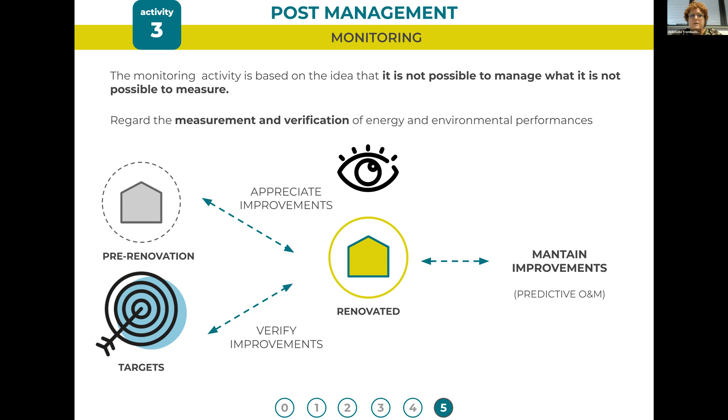The researchers of the Living Lab can support to investigate and to apply the best monitoring system. And when I say the best, it's not only the more complicated, but maybe the much more user-friendly for the building manager and for the public organization. The building manager will draw up and manage the monitoring protocol because they are involved in first line in the monitoring process.

The students can visualize the knowledge thanks to the software, thanks to the visualization of the performance, the monitoring, all the sensors installed in the building. So day by day it's possible to compare, for instance, the external temperature with the internal level of comfort, or maybe the energy production if there is some integration of renewable energy, or for instance the passive heat gains, or the level of environmental quality in their classroom.

So they have the knowledge, stimulating their positive and proactive behavior, for instance opening the window or otherwise closing the window, or changing their clothing, or having a positive interaction with the building in order to implement the reduction of energy consumption.